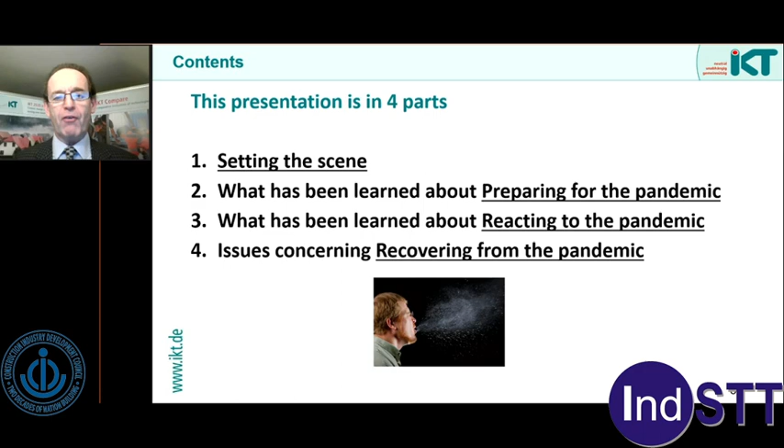They focused on 3 things then: How was the disease and the virus transmitted? What role did water and sanitation play? And what do they need to worry about concerning occupational health and safety?

From that first meeting, they agreed 3 principles. They had to be very careful about the occupational safety for their staff, avoid unnecessary risks, but concluded on the evidence available that if they applied the usual hygiene regulations that apply to working around sewage, then that should be sufficient for the moment.

It was the last time they met together, as I said, and they then did 4 things subsequently. They regularly discussed and shared plans with each other of how they were coping with the pandemic. They made a decision to open up their discussions to other sewer network owners and also to publish information in English. So we did a series of 3 English language webinars to widen awareness.

The members started sharing their documents online, and if you search for KomNet Abwasser, you will find, it's in German, you'll find the information they shared with each other, and IKT provided a help desk for them.

Fairly typical of actions taken by associations throughout the world to help their members.

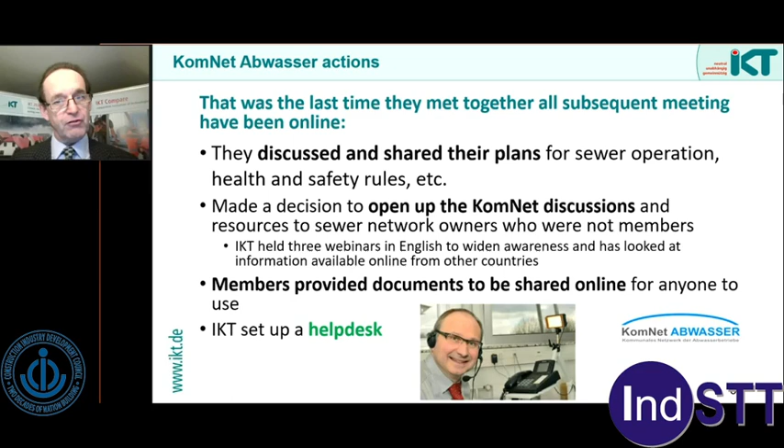Assumptions initially had to be made about the risks for water and sewage, and subsequently they proved correct. So that provides some reassurance that collectively we'll be able to respond quickly to the next pandemic when it comes along.

We looked around for guidance and advice, and actually one of the most comprehensive guides we found was a checklist that's been produced by the US Environmental Protection Agency. It's their incident checklist for pandemic incidents, and that divided up the actions into 3 stages: preparing for the pandemic, responding to a pandemic, and recovering from it.

So preparing, in a way, we're still ongoing because situations change and national regulations change, so those had to be thought through. But mostly what is happening at the moment is responding to the pandemic. We're not in a recovery phase yet.

When I say we're not in the recovery phase yet, we still really don't know how this is going to pan out. So we're in stage 2. We don't have vaccines commonly available yet. There is no cure, and further waves of infection are expected.

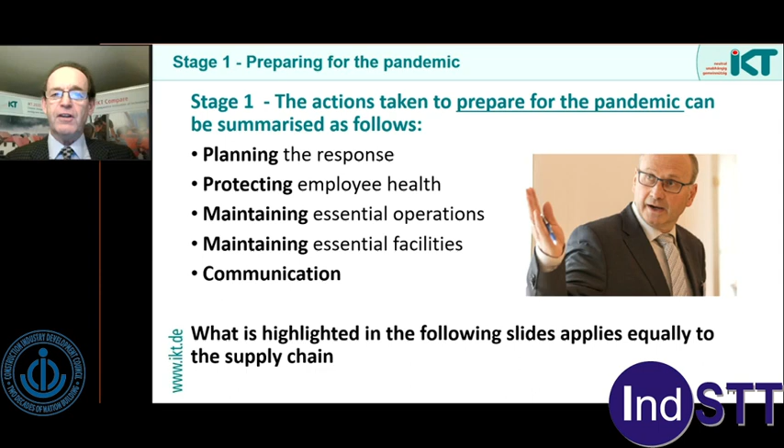The typical planning actions: creating a team to lead the response, updating the response plans. Really, nobody's existing response plans anticipated exactly what was going to happen in terms of lockdowns, shutting down of business, disruptions to the supply chain, and for many businesses, losing all of their income overnight. Reviews of information technology, the hardware, the software, how we're going to communicate, and ensuring how staff are going to be able to continue to work under national regulations, for example what counted as being essential services.

When it came to protecting employee health, you need to review your existing rules, ensure personal hygiene, ensure the supply of protective equipment, but particularly check all the way through that employees understood what they had to do. For those who didn't have to be out in public contact or working in the field, arranging home working and other social distancing measures became important.

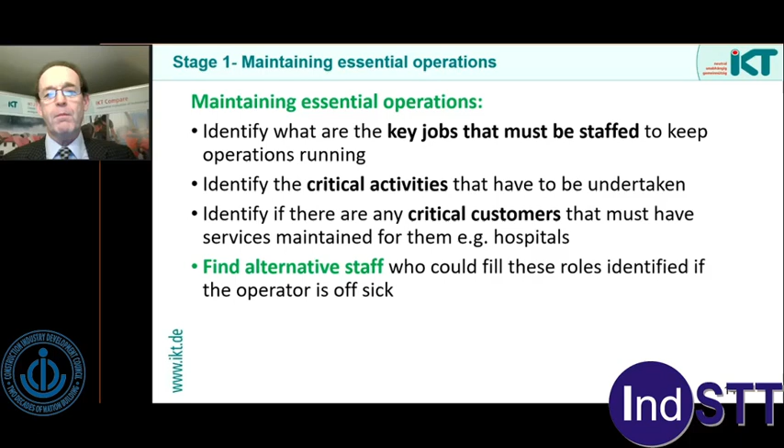For us, managing essential operations was a case of identifying what jobs needed to be staffed in order to keep operations running. What were the critical activities that had to be undertaken? Also, who were the critical customers - the hospitals and other facilities that absolutely had to be kept online for supply of water and wastewater. And then finally, supporting all of that was finding alternative staff, trawling through staff in water companies and others who perhaps had past experience of running pumping systems or a treatment works or a distribution network, who are perhaps now doing desk jobs but might be available to be pulled back if needed.

When it came to the facilities, clearly there's pumps, tankers, valves etc. which need to be maintained, but also what equipment was needed to maintain them, what supplies were needed. So there's a lot of activity around working with suppliers, developing the systems, and finding alternative sources and creating stockpiles if necessary.

Continuing with the theme of stage 1, the final element was communication - what needs to be communicated to customers and others, and how to set those up. Particularly, I think one of the main lessons that came out of this was a realization that perhaps traditional ways of raising or collecting revenue from customers would have to change, and that online payment was perhaps going to have to be created as the new norm.

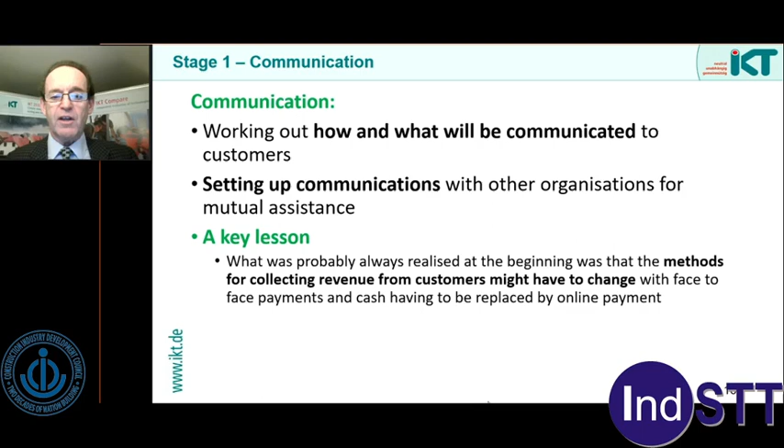When we look at how there was a response to the pandemic, we've covered several of those items as well, so the plans are in place. Now it's all about protecting employees' health, maintaining operations and facilities, doing the communication. But there was also an important one - actually recording what went on, particularly for those water companies in a heavy regulatory regime in terms of finance, environmental protection, or performance in terms of customer complaints. They needed to really understand what happened so that they could subsequently argue the case with regulators if there were likely to be penalties for what had taken place.

So this is the sort of stage where most of the sewer network operators are currently at. And when we look at...

A key issue that actually cropped up for many organizations was actually getting their staff recognized as being essential workers. This wasn't recognized everywhere, so you have guys out trying to maintain water and sewer supplies getting stopped by the police. You get angry reactions from the public, seeing people working in the road saying, you're going to give us this disease, what are you doing here, and having to explain to them that it was essential that their water and sewerage was maintained. In many cases it was also necessary to be an essential worker in order for staff to be able to work, if there was childcare, free movement, or even testing services available for essential workers only.

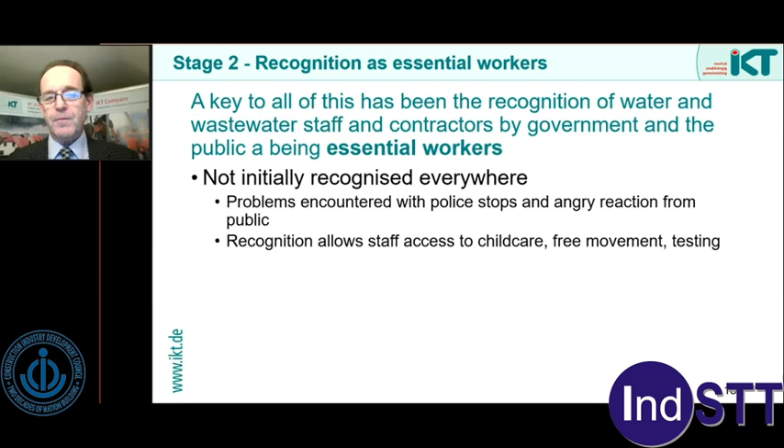When it came to protecting the health of staff, these were the sorts of measures taken: outdoor team meetings for field and office staff, one man per vehicle or two men per vehicle but keeping teams separated, so if one team went down with the disease, others wouldn't, and maintaining social distancing rules when working.

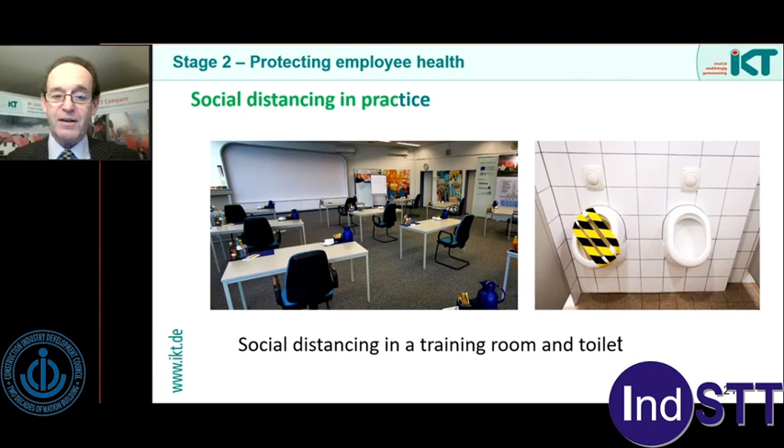Keeping staff informed about the risks cropped up. Partway through the year, it was announced in the press that it would be possible to test for coronavirus in sewage because it had been found there. This caused consternation, and right across Europe, trade associations and others had to deal with concerned staff and their families asking what this meant. Unfortunately, the initial press releases hadn't explained that it was just genetic material found, not the live virus, and that caused quite a lot of trouble.

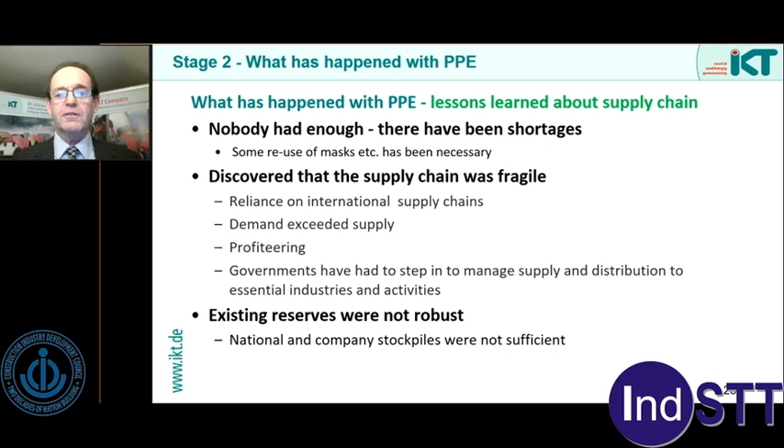I touched upon what happened with PPE. Nobody had enough, there were shortages, and it was discovered that the supply chain was fragile and existing reserves were not robust. So there were a lot of lessons learned there for future pandemics.

A really interesting development was home working. There were issues to start with, such as what hardware and software to use, and whether there were any human resource or health and safety issues. But actually a lot of staff discovered they liked working from home and were able to continue doing their roles, with fewer interruptions. There are a number of studies showing that productivity and innovation can actually improve with people working from home.

There's a reduction in office costs, though some equipment costs for equipping people to work from home.

The really big thing that came out of it, I think, is the surge in use of online communication. The water sector is pretty conservative, and over the years many people had been trying to say let's communicate online rather than having endless meetings and traveling halfway across the country for sales and project meetings. But most water companies have now discovered that it works well. Communications are faster, and there's also a pleasing reduction in costs for conducting meetings, travel, and training.

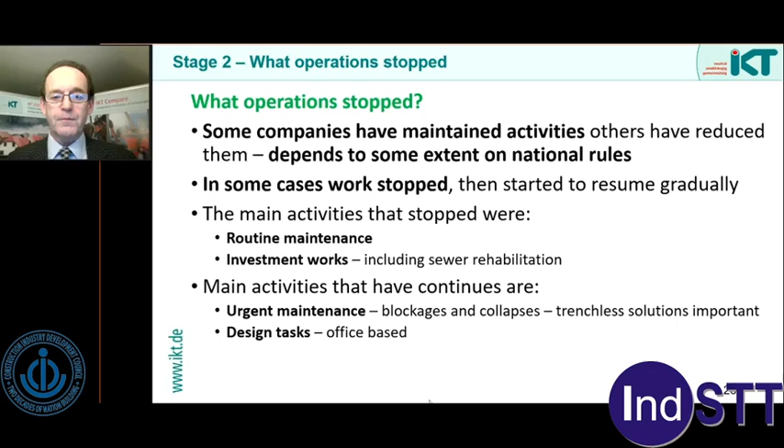Looking at contractors, in some cases they haven't been able to work or had to reduce their active staff. There's been a knock-on impact felt in terms of contractual arrangements, with more flexibility on both sides, contractors and clients: better ways of dealing with deadlines, not applying financial penalties for delays, extensions to delivery times, other consequences of delays, and more interruptions allowed or suspension of work. There has also been some postponement of tenders or offers during the period.

Critical for the water and sewage companies themselves, though, is what's happened with their funding.

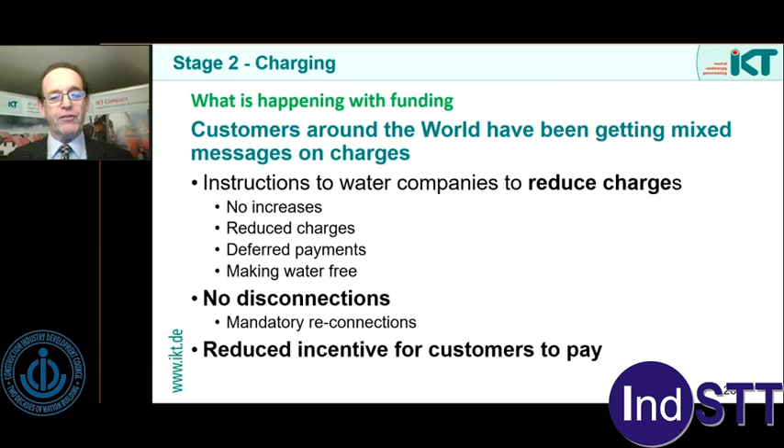Around the world, customers got mixed messages. Water companies have been instructed variously by governments not to increase charges or to reduce charges, to defer payments, or even make water free, no disconnections and mandatory reconnections. So there's been a reduced incentive for customers to pay.

And then there have been changes to revenue. Commercial and industrial revenue dropped during closures, domestic revenue went up. If you are a water company in a city, no commuters, no tourists. In rural areas, more domestic use from people staying home, but fewer tourists. So different impacts felt in different places.

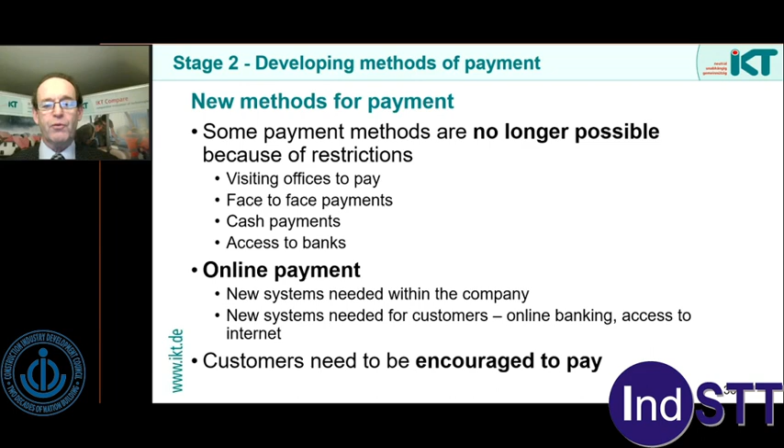There's been a need for new methods of payment. You can't have people visiting offices making face-to-face payments. Cash payment became difficult, access to banks has been difficult. So new systems are needed with online systems. Online banking has seen a surprising increase throughout the world. But of course, customers do need to be encouraged to pay.

The impact has been interesting. The World Bank recently reported a 10 to 40% reduction in revenues, and as high as 70 to 80% in the case of some of the water companies they were dealing with. So they've created spreadsheet tools.

The Latin American Bank has had a similar experience. And in Europe, Aqua Publica Europea, a trade association dealing with publicly funded water and sewage companies, said their members reported a 10 to 15% reduction in income, and as a consequence, having to stop part or all of investment.

As a result, in many countries trade associations representing the sector have been raising issues of financial support on behalf of their members. Public finances are going to be under strain for years to come, so it's apparent that water and sewage companies will have to find smarter ways of delivering their services for less money. Trenchless technology has some advantages here.

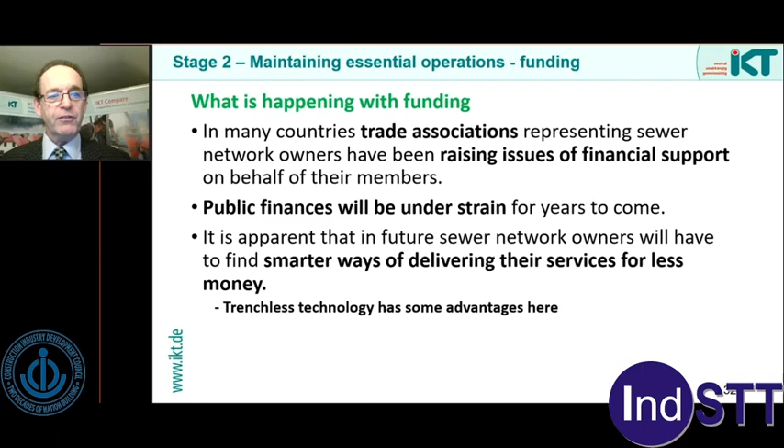I've mentioned communication with regulators and keeping records - that's been a key lesson learned, particularly if you've had activities that had to be stopped, you had to keep regulators informed and aware of issues. That's another place where trade associations have been important, working on behalf of their members to raise such issues and deal with authorities collectively.

On this theme of associations, the current situation has really highlighted that associations have a role to play if there's a change in advice relating to transmission. They've got a job to play for members in signposting changes in national regulation, lobbying government and regulators on behalf of members about public health, financial support, environmental regulation, and providing access to experts who can give needed advice.

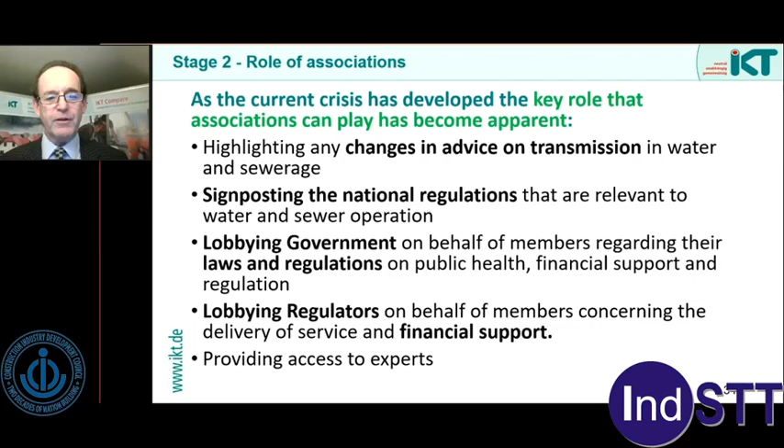What's been fundamental to that? Embracing online communication, such as we're doing today. You can't hold face-to-face meetings, so online is likely to become the new normal. Working from home is now acceptable, and you can now undertake meetings daily, weekly, or monthly. In Germany, the KomNet Abwasser now meets every Friday. In the UK, the Sewer Rehab Contact Group, which met 3 times a year, now meets every month online.

But the converse side is that conference organisers are experiencing problems with events. Major events like the German IFAT exhibition should have taken place this year - it's now not going to take place until 2 years later than otherwise expected. And in the UK, STT's annual No-Dig event was put back from September to next March, and now that's being put back from March to June.

A major outcome, I think, is going to be more automation and remote working on sewer networks. This is where all companies have the opportunity to learn from each other nationally and internationally. There's going to be a lot of innovation and development, and water and sewage companies are going to be more receptive to new ideas.

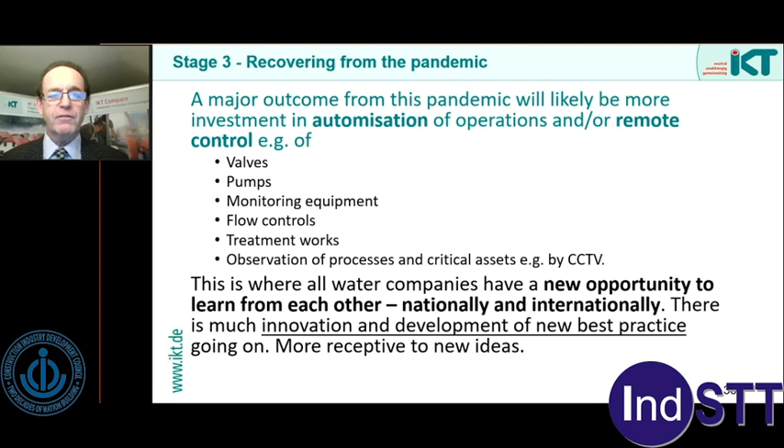What next? This is the final slide. The situation's still evolving, the disruption is going to be long term, and there's a lot more information and data that's going to emerge. Keeping an eye on what's going on internationally and nationally is going to be important. Creating or joining networks of organizations which can answer questions of mutual interest is probably the best way forward - that's really emerged from the lessons learned from this pandemic so far, and different countries are at different stages, so there's a lot to learn from each other.

So we talk of a new normal when this is over, after the pandemic - the new normal is already here. It's coping with the pandemic whilst having to make tough decisions about water industry investment and operations. Essentially, going forward, most water and sewerage companies are going to have to find new ways to continue delivering their essential services for less money, and quite clearly there is a role that trenchless technology can help with.

We are an engineering research institute that undertakes work primarily for sewer network owners to evaluate issues that they have and identify solutions. So the talk I'm giving now is divided into 5 parts. I'm going to explain what we expect from flowable backfill material, explain the background to the evaluation that we undertook, how that was undertaken, what the results were, and what conclusions did we come to at the end, particularly with regard to quality assurance.

So what is flowable backfill? Well, it is backfill that can be poured into a trench, will spread out, in theory self-level, surround pipes or other structures, and does not require compacting like normal backfill. But it is a mixture of materials. Natural soils or sands and gravels are brought in, or recycled materials can be used. You have binders, you have various add-ons like stabilizers, and its consistency is usually controlled by the amount of water that it contains.

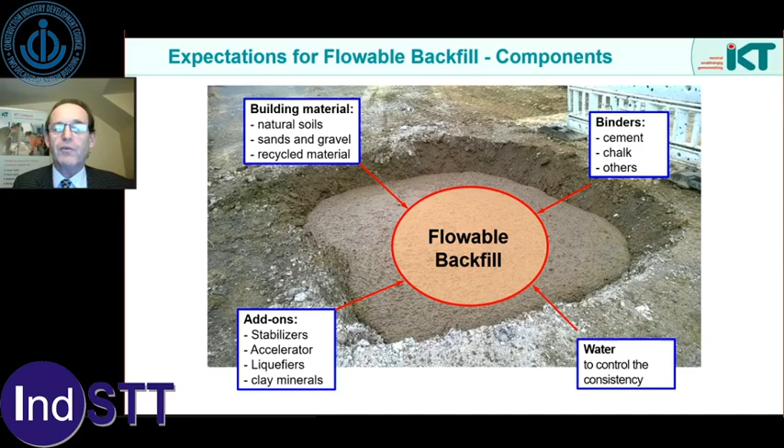But what are its advantages? Well, it can be used in these hard-to-reach areas. So perhaps areas where it's difficult to get other normal compacting equipment into, because we're always interested in being able to properly support pipe work and underground utilities. It's particularly useful in sewer or pipeline construction as a consequence.

Because it's flowable, the expectation is that it will self-compact and it will fill the available space without creating any cavities, without the need for mechanical compaction to ensure that. And in theory, it should be homogeneous, constant throughout in terms of its volume and stability. But particularly, what you want from a flowable backfill, which makes it different from flowable cements, foaming concretes, that type of thing, is that you can re-excavate it when you want to, and you should be able to re-excavate it easily, so you can get back down onto those utilities.

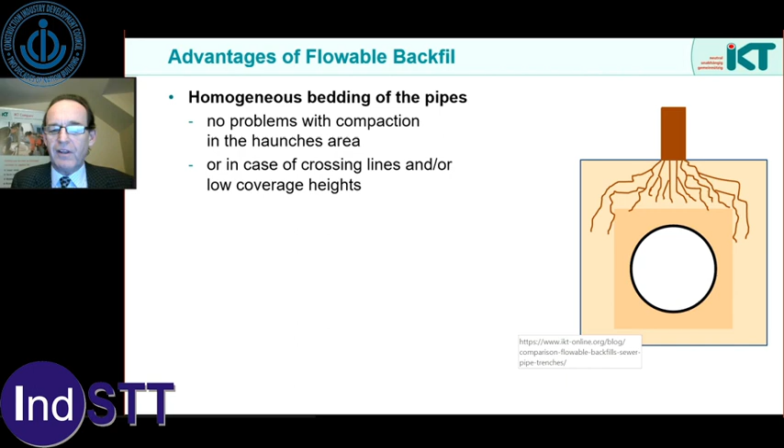We mentioned the homogeneous bedding of pipe. Now, one issue with conventional backfill is that it's difficult to get into the haunch areas underneath the pipe in order to properly support it. So with a flowable backfill, this should sort that issue out for itself. And it can be useful if you've got low coverage above, or if you've got other intricate arrangements that you get underground. It can flow in and around all of the structures that are there.

We mentioned the no compaction device being required, so in theory you can have smaller working spaces, narrower trenches. As a consequence of no compaction, less vibration, reduced emissions, perhaps lower excavation costs with the narrower trenches. And it's adjustable. You can adjust the composition depending upon what you want in terms of how quickly you can walk on it, what sort of final strength you require, and the requirement for re-excavation. Because it sort of flows around with very little space or pores in between, it can provide protection against root intrusion and also against infiltration or exfiltration of water into or out of a pipe. And it can have properties in terms of being non-permeable to gas.

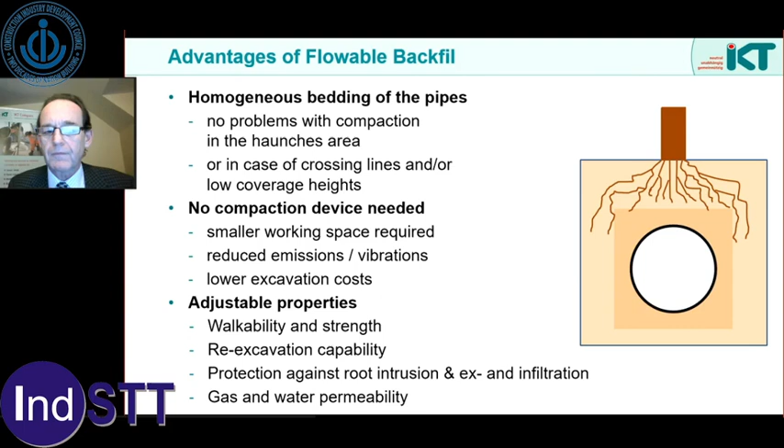However, it's a liquid. And so one of the things you have to be aware of is that if your pipes are empty, you may get buoyancy issues. So you have to use some form of buoyancy control. You need to consider the static calculations, because you're introducing this liquid into the trench, the interaction between it and the surrounding soil. And you may require lining of the narrow trench, and you need to be considering the fact that it's flowable, so it could leak into other spaces. So you have to be sure that there's nothing else it's going to go into where it shouldn't.

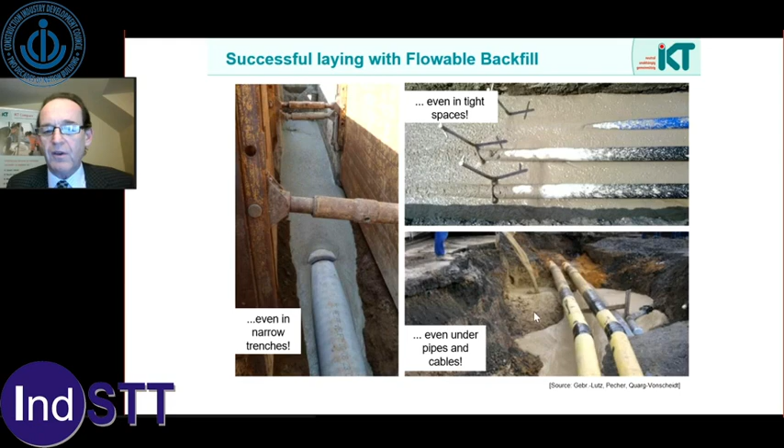So what it might look like at the end of the day: poured into a narrow trench, filling around the pipe, getting into small tight spaces between different utilities, and working quite well in odd shapes where it might be otherwise very difficult to get in and do your normal compaction.

So what did we do with our evaluation? Its objectives, and the objectives of all of these evaluations we do, are to create market transparency, to reduce the investment risk for the sewer pipe owner who is wanting to commission the pipe and use this material.

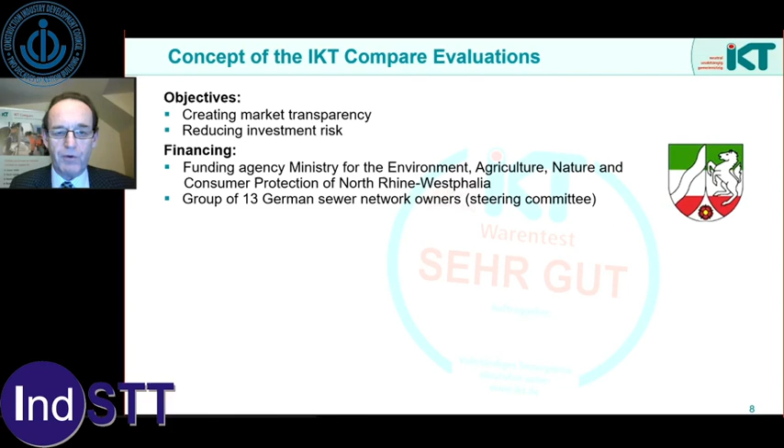The project we undertook was funded by the Ministry for Environment in North Rhine-Westphalia, Germany's largest state, and also by a group of 13 German sewer network owners who formed the steering group for the project. The steering group made all the decisions, advised by IKT, but they selected the products to be evaluated, the manufacturers to use, the suppliers, development of the test concept, and what kind of evaluation scheme was used.

The outputs from this are 2 reports. First, a report on this comparative exercise we undertook, which is already published and in the public domain. Then there is going to be a wider project report which will be published looking at the wider issues surrounding this and the QA lessons that were drawn out from it.

And what does it mean for the market? The consequence of this exercise is that the sewer network owners understand quality assurance issues. They can call for improvements on products, or look for improvement in products, and they become informed customers or informed clients who know what to ask for.

So how do we go about this evaluation? We created, in a large test pit that we have at IKT, 5 identical pipe trenches. These were 3 meters wide, 3.5 meters deep, and 6 meters long. In them we placed 2 manholes, a concrete and a plastic manhole. We had a sewer pipe running between them and various other pipes.

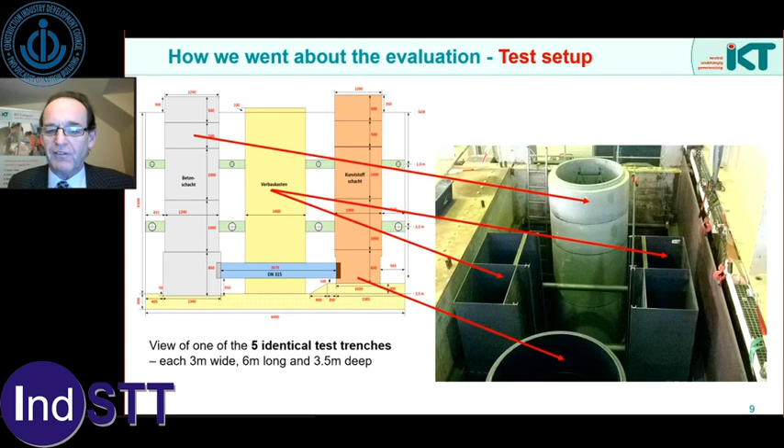Also, we were interested in shoring. The next slide explains how this worked, because we wanted to know what happened when we ripped the shoring out of the sides of the simulated trench, and to see what happened to the flowable backfill. So what we created was these boxes either side, simulating a narrow trench with shoring that could be removed. We filled them with sand right up to behind the shoring in 2 cases, but we left a void in the others, as you might find in an uneven trench. We wanted to see what would happen when the flowable backfill moved into those voids when we removed them.

Another view of the layout from above, just showing the pipe arrangements. We were interested in how it would flow around small arrangements of pipes, so we created a little box of pipes here. We had the main pipe at the bottom, and then 2 more sewer pipes higher up. Also, there were some cross members supporting and taking the weight between the 5 cells. There were 5 identical cells like this.

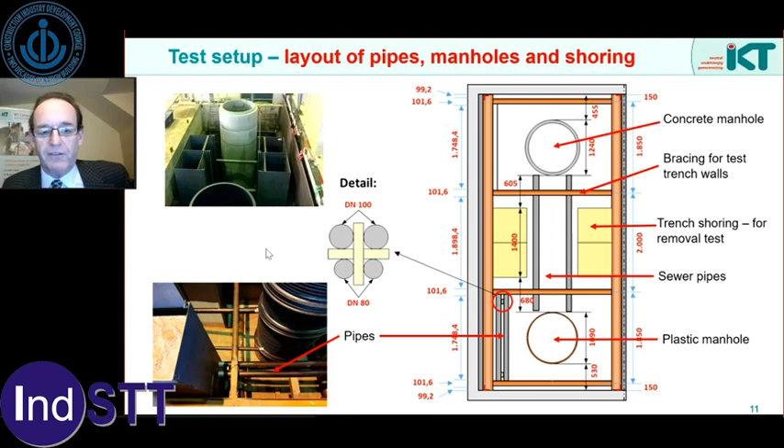So we dug it up to see what would happen and looked at the material. On the quality assurance side, we looked at various aspects to do with the delivery notes, what monitoring was in place by the installers, what quality issues and quality marks they had, training, and we also looked for anything notable which occurred during the project that we weren't expecting.

Now, we had a couple of knockout criteria, or KO, as opposed to OK, the KO criterion. So if it didn't flow properly, that would be a failure outright in the installation phase. If it doesn't become strong enough to be able to build over, i.e. put a road back on it, that would knock it out in the use phase. And we also needed to know whether it could be re-excavated easily and recycled. So that was how the overall scoring system operated.

We selected products. There were 16 relevant products available on the German market that were discovered, this is in the last couple of years. The project finished this year. We looked at what we wanted in terms of the composition of the material, the requirements set out by the steering group.

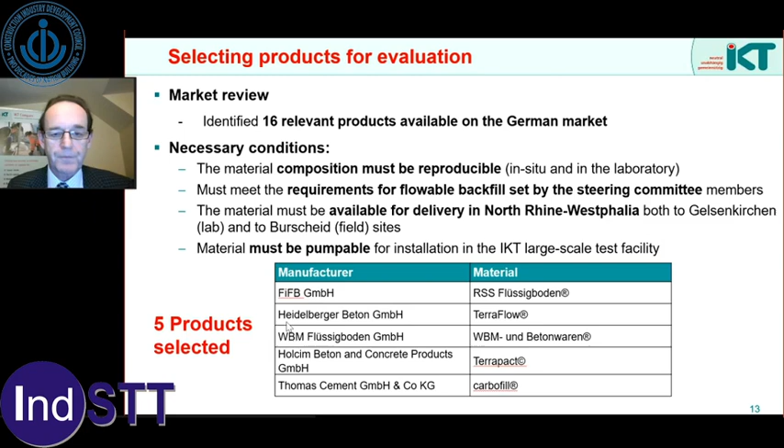So first of all, we did the installation phase. We're looking here at flowability, how it could support pipes, what happened when we ripped that shoring out, how stable was it volume-wise, and the accessibility was how soon could you walk over it. That scored variously, contributing 40% to the overall 85% for the performance checks.

So with the flowability, the most basic test is done, as you might do with other types of flowable concretes, etc. It's spreadability - how wide does it spread when a certain amount is poured from a particular height? We looked to see how that would function.

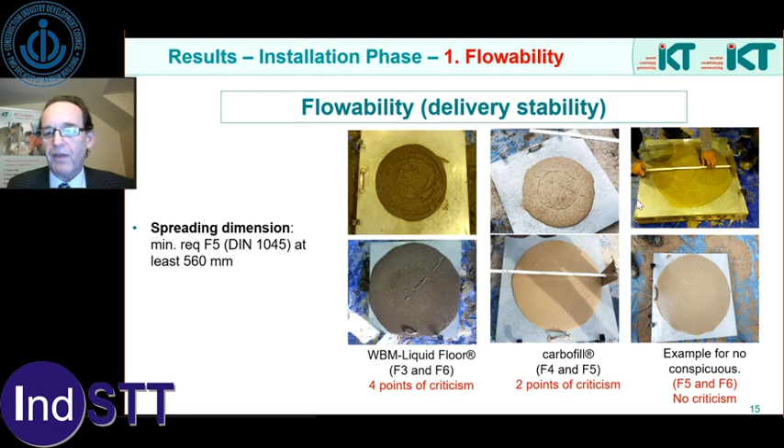There were a range of issues as well to do with it - the consistency of the material, its stability. Self-leveling was interesting. We only poured the product in at one corner of the trench, and when it was finished we looked to see did it actually level across the whole trench, or was it higher at one side and lower at the other?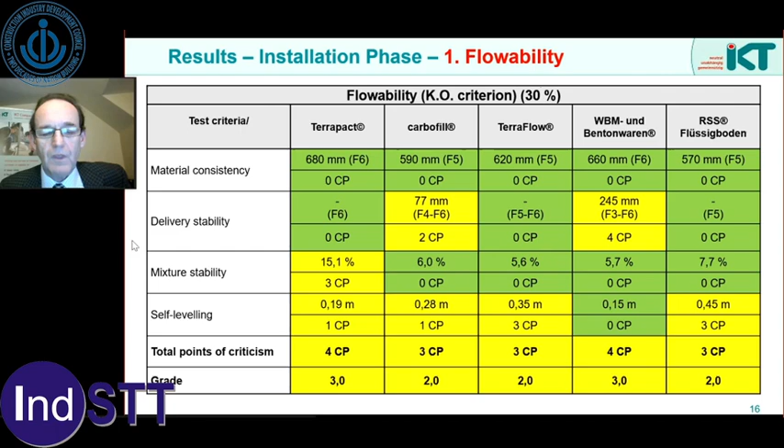We looked at the pipe support. So when we came to the excavation, we excavated down very carefully and we lifted out things like the shoring between, or the bracing. We lifted out the longitudinal pipes and we also lifted out the main sewer pipe to see what it would look like underneath.

And these are the sorts of things we found. These are fine. We did find in some cases that there were small voids, but overall those were statically irrelevant. When we did the static calculations, they were not going to severely impact the support to the pipe.

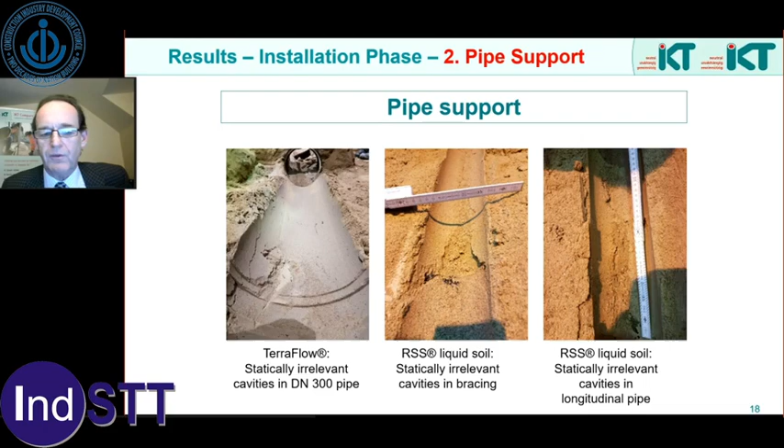We got a range of results again, but one product we actually found we couldn't excavate. It had set so hard we had to use mechanical equipment to break it up. So we were not able to tell how well that had actually performed as we were breaking it out of the ground. But with the others, we had 2 which had absolutely no issues. We had a few small cavities and 1 or 2 others. So we've got scores between 1 and 2 for the other 4 products.

When we pulled the shoring out, that was interesting. Now, we don't know when to pull it, so we asked the advice of the suppliers. How long do we leave it before we pull the shoring out? So it was more their decision, and we discovered we've got a range.

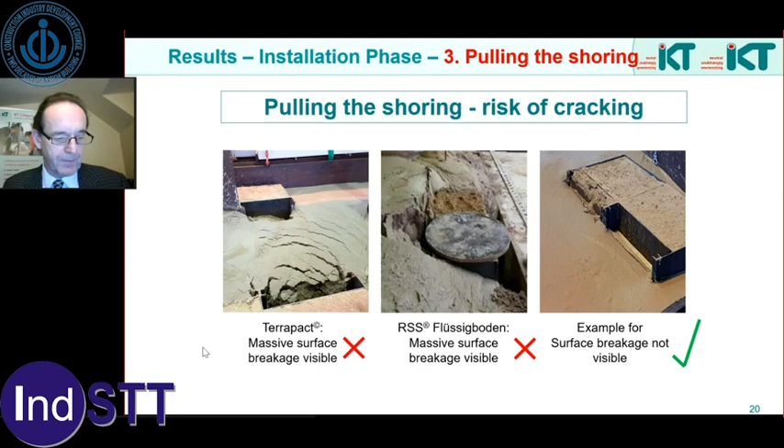The result from pulling the shoring, again, fairly mixed results. 3 of them were very good. A couple of them had issues where, as I showed you there, we had the breaking up of the surface. It could have been that we were advised to pull the shoring too late. So that is something that has to be considered with this type of product.

We looked at volume stability. So this is a product containing water. In these tubes, we looked to see what happened in terms of settlement and also the settling out of the water above. And we scored them again, and we've got a range of scores from 1 to 2 here.

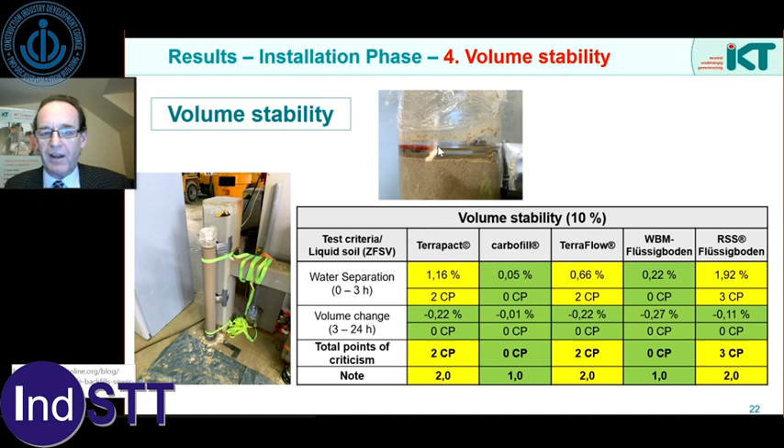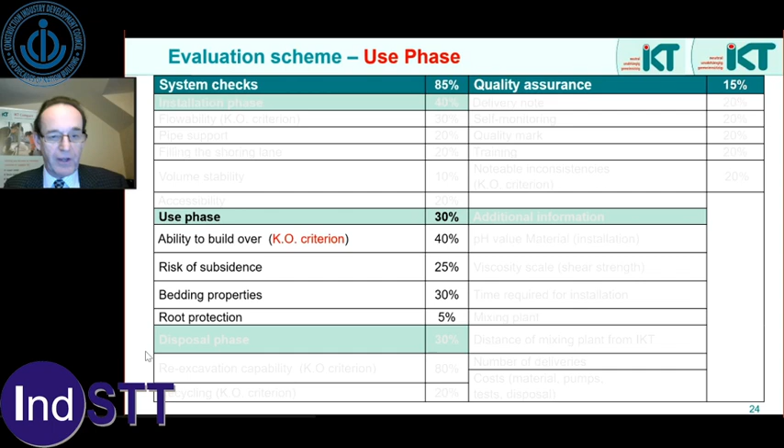So going to the use phase, we looked at the ability to build over. That was one of the failure criteria. We used a static load plate to look at what level of support it was able to produce after 28 days. This is a fixed time, but obviously in many cases it would have been possible to build over earlier. We had one product that took 56 days and still wasn't properly supporting, while others had a 7-day value here.

And we also looked at risk of subsidence — where it shrinks over time. We did initial volume stability tests, but also longer term exercises in pots where we looked to see how it shrunk and whether there was subsidence risk. But that was not an issue in most cases.

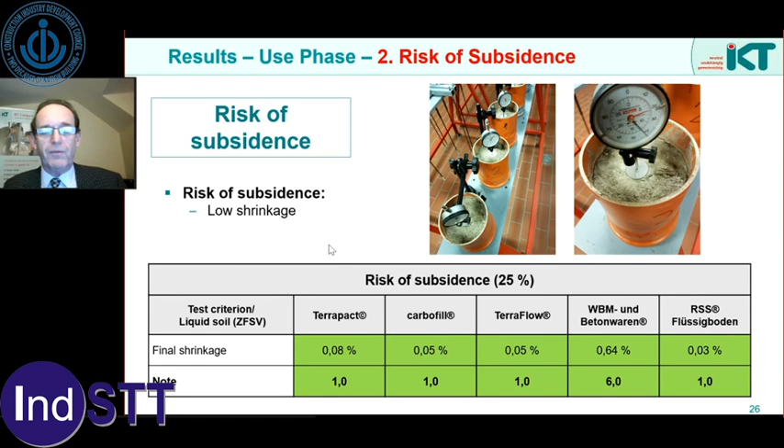Looking at tree roots, when roots grow in or near a pipe, it's usually because they're following the path of least resistance. A series of cracks on the surface here would allow tree roots into this structure, but as we discovered, it didn't go all the way through to the bottom. Also around a couple of sides of the manholes we're seeing a bit of shrinkage, and we got odd little bits of shrinkage or cracks around the edge of shoring, which would give roots a way through.

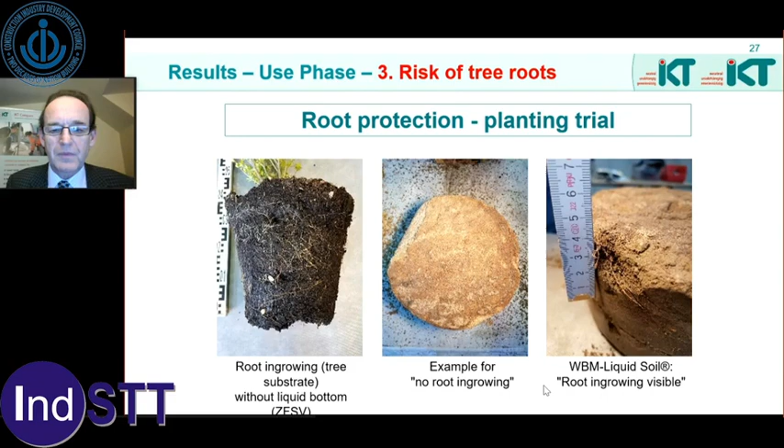We did some experiments in pots with ordinary soil and pots containing the liquid fill, and in one case had some evidence of roots managing to get through the liquid soil, but in most cases they couldn't. So again, a range of scores were achieved from the different planting trials.

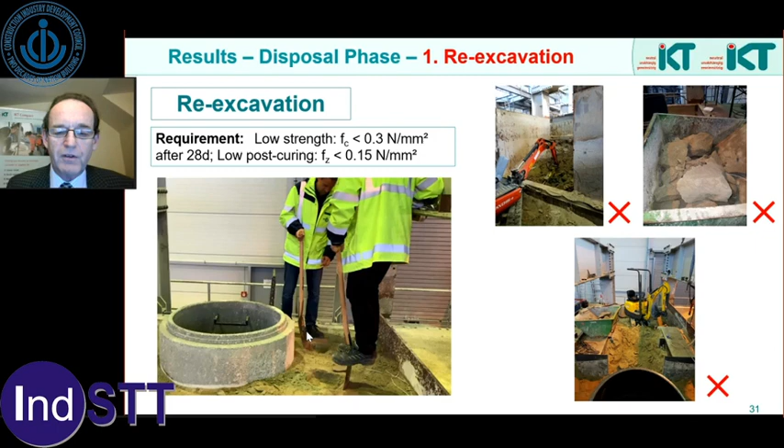When it came to disposal, we did have some issues. The steering group members went in with spades, trying to dig into the surface of one of the soils, which they couldn't do. We ended up having to get the contractor in with digging gear to cut it out, and it was not successful as a consequence. So with re-excavatability, we actually had 2 products which proved very difficult to excavate, and of the other 3, only one was really excavatable, but the other 2 weren't too bad.

With recycling, that again was interesting. We had to look at recyclability using a scoring system in Germany, which is based upon acceptance in landfill sites. We did have one product which would not have been acceptable in a landfill because of its chemical composition.

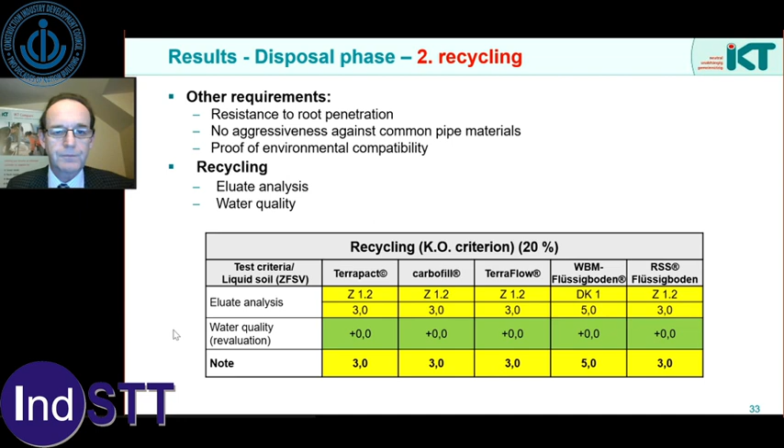And then when we moved on to look at quality assurance, we found a range of results, from no issues, shown in green here, to some minor issues to do with training, etc. But under conspicuous features, one product — they didn't deliver enough material, had to go back and get more, so we didn't get what we originally asked for. There was also some issue with the calculation of how much material was delivered to site.

One product, they ended up adding some water when they got on site in order to make it flow better, and then we discovered that the warranty was invalidated because water had been added on site. And one product, we had an issue when excavating it of the smell of ammonia, which exceeded the acceptable limits, and we ended up having to use gas masks for the staff when they were excavating.

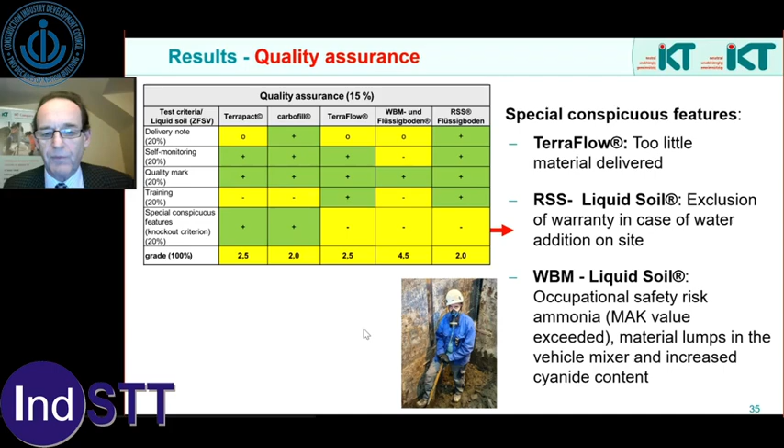So the overall scores we got from these products — bearing in mind this is rated upon 85% for performance and 15% for quality assurance — we had a couple of goods, one unsatisfactory, which was marked down because it was difficult to re-excavate, and 2 that turned out to be inadequate. One because it was more or less solid when we tried to re-excavate it, and one which had a number of issues, particularly around recycling and disposal.

So if you remember, we had these knockout criteria — if you failed them, that meant it wasn't acceptable in that formulation. So what were our conclusions? We found large differences in quality, as you can see. But we did discover that the various advantages of flowable backfill could be achieved in terms of pipe support, flowability, and re-excavatability.

Generally, it was calculated they could be built over after 7 days, and it may obviously be less. You could do more calculations if possible.

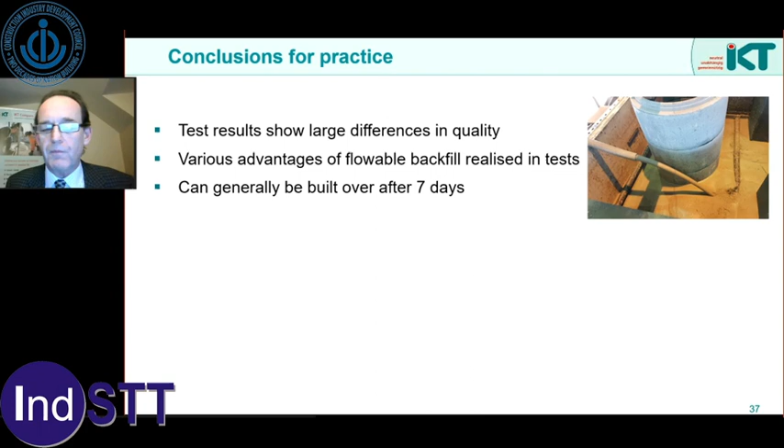We realized that the knockout criteria identified by our steering group were the ones people should be looking out for.

It was realized that a lot of the issues discovered, like material that wouldn't excavate and material with recyclability issues, were down to the management or quality assurance of the mixing plant and the materials used. So that is normally out of your control, and you've got to rely on good QA by the supplier. There is a real conflict between re-excavatability and being able to walk or build over quickly. That comes down to the formulation and the mixing, and needs to be carefully taken into account.

We discovered that when you pull the shoring out, you can get disturbance, and that is a bit of an art, knowing when to remove the shoring. That's based on experience. And quite clearly, there is a requirement for quality assurance and supervision on the construction site.

We realized that in Germany there were very few suppliers that could supply across the whole country, so it tends to be more of a local supply market.

To finish, there is a report publicly available on the website, which you can find through our IKT website or using this link. There will be a full report out in due course, and there are contact details at the bottom here for emails from myself and Dr. Mark Klamath, who was the project manager for this. Thank you very much for this opportunity to present, and we now go into questions.

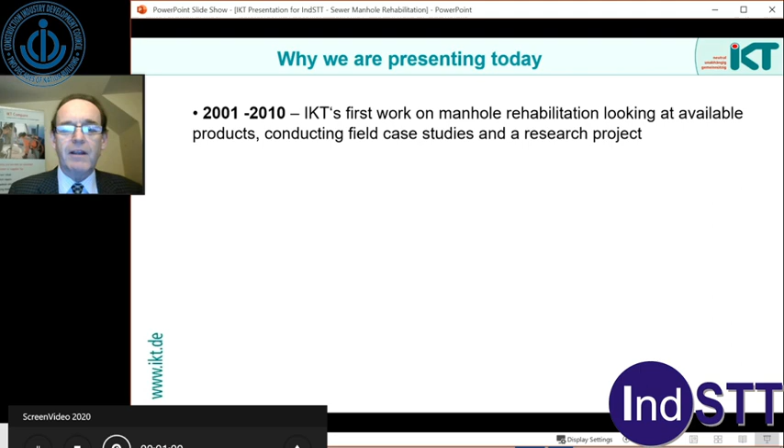So why are we presenting today on manhole rehab? It started two decades ago when German sewer network owners first became aware of products available to help rehab sewers, particularly concerning preventing infiltration. We did more work on something else of interest to them, odor control products placed beneath manhole lids to stop smells getting out.

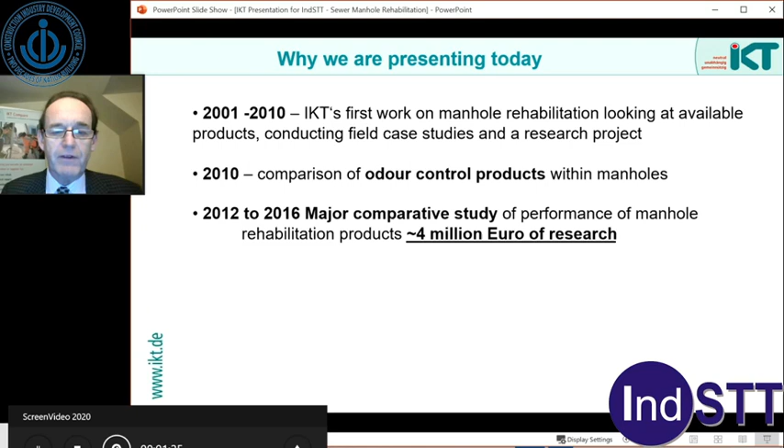Our main research was undertaken from 2012 to 2016, culminating in a major study comparing the performance of different available technologies. Since then, we've been doing quality assurance field studies involving hundreds of manholes in the Netherlands and Germany, and running 2 to 5 day training courses.

So what I'm going to talk about are three things: setting the scene of what happens with sewer manholes in terms of their primary and secondary functions, how we went about comparing the performance of rehab techniques, and finishing with some of the lessons we learned.

Well, what about sewer manholes? They are more than just a manhole cover, which is what most people see. Down the shaft, they're actually possibly the poor relation of the sewers themselves. A lot of effort goes into keeping the sewers flowing, but not so much into managing the condition of the manholes, although an obvious issue is often failure of the rungs that allow access, and in this case they've been removed.

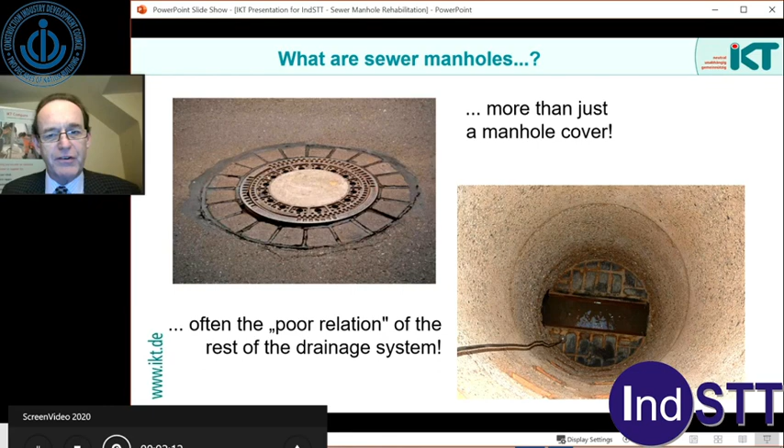The primary function is the relief of internal pressure, and when this happens it can cause damage to the interior of a manhole shaft. Another primary function is accessibility for people and equipment to get in. So climbing technologies and equipment to stop falls and encourage occupational safety are important, as is concern for atmospheric measures relating to dangerous gases.

And another third of the primary functions is ventilation, allowing oxygen to get in, and unfortunately, that does result in odor nuisance.

There are a number of secondary functions. As part of the sewer network, a manhole should not allow infiltration. Uncontrolled water ingress can result in overloading of sewage treatment works, where too much volume of water is received during periods when the groundwater table is high. Conversely, you can get exfiltration of sewage into aquifers as a result of damage to sewers. You've got to remember that apart from the chamber, you've got the seals which connect to the pipes going in and out of the manhole.

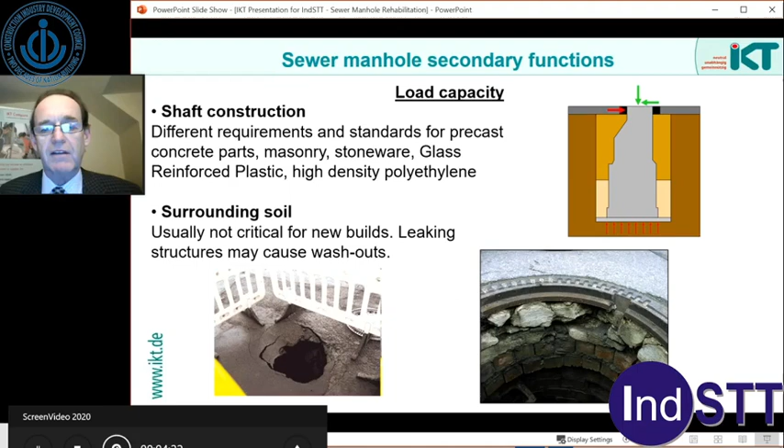Another secondary function is that it has to resist loads from above, from below, and from the sides, from the surrounding soil, in order to correctly function. So any rehab needs to take that into consideration. And a final secondary function is there is a road safety issue with the manholes on top.

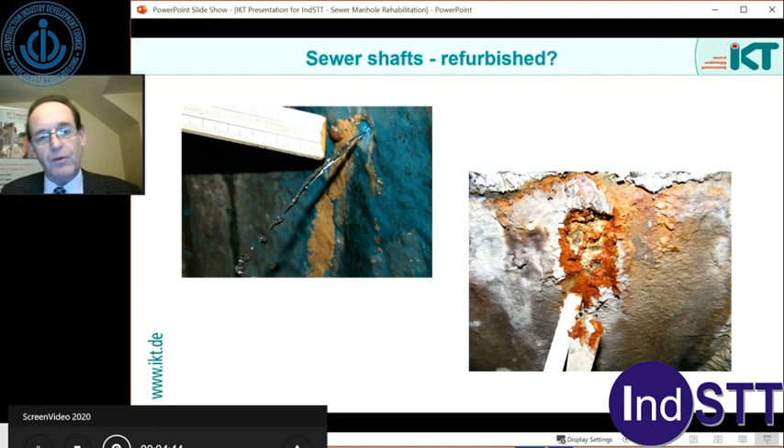So what did we do about comparing the performance of rehab techniques? The sewer network owners had started to realize that although they had these techniques available, various linings, they weren't always functioning properly. So they wanted to know which ones are suitable, what have they got to look for. The exercise we undertook, an IKT comparative project, was to look at whether you can permanently make a manhole watertight using a rehab technique. They wanted to know the strengths and weaknesses of the available technologies, what quality to expect, what issues to look for.

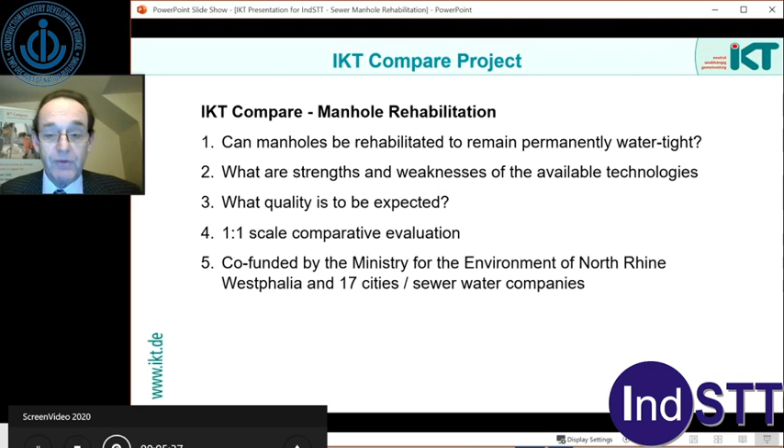We were required to undertake a one-to-one scale evaluation. The whole project was funded by the Ministry of the Environment for North Rhine-Westphalia, the largest of the German landers, and a group of 17 cities which own the sewer networks, who formed the project steering group.

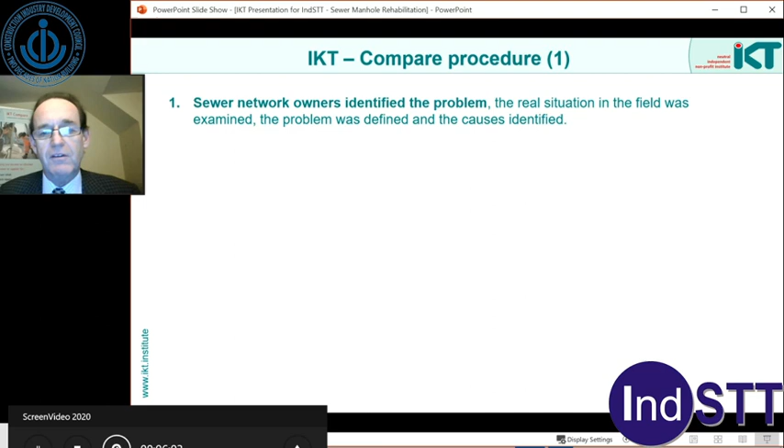Now we have a procedure that we follow with these comparative projects. We've done them for sewers, lateral connections, lateral sewers, manholes, flowable backfill, a whole range of products. We always start by working with the sewer network owners to understand exactly what the problem is that needs to be resolved. So we looked at the real situation in the field, going out with members of the steering group and looking at their manholes, working out with them what's the actual problem they want to resolve and what are the causes.

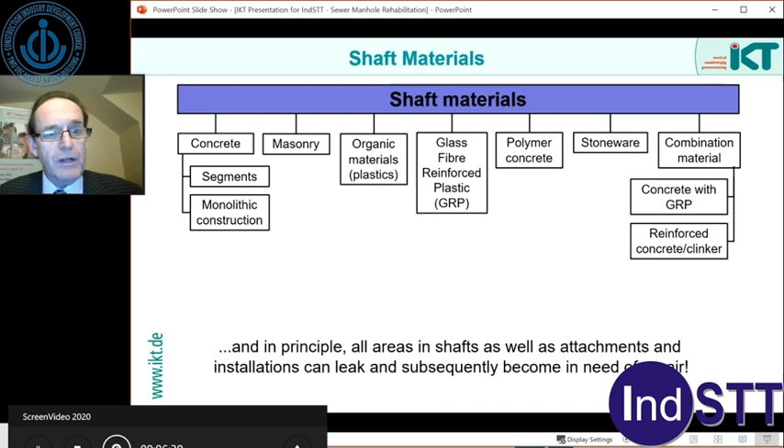Something that also became clear was that there are many different types of materials used for manhole shafts: concrete and masonry, a range of plastics, stoneware, and some combinations. It was realized that in Germany, the majority of manhole shafts are concrete, then masonry, and relatively little plastic. That's relatively new, the concept of using a plastic manhole shaft. So it was decided by the steering group the focus would be on concrete shafts.

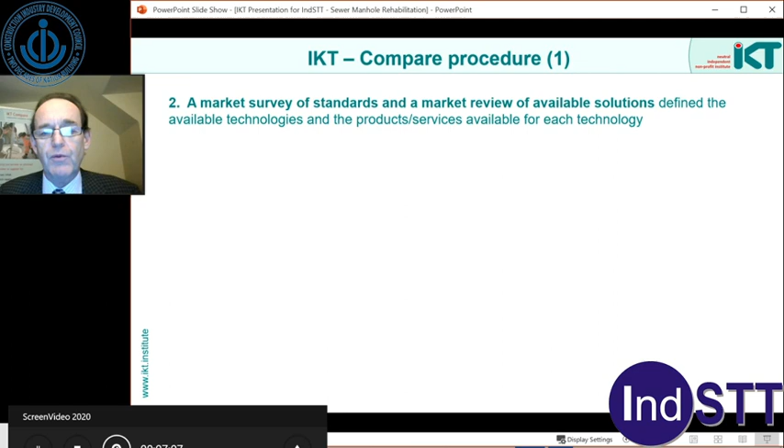We then undertook a market survey of standards, but also the available solutions and technologies - what was out there that was available to them to undertake rehab and that needed to be compared. We came up with essentially three technologies: mortar coatings applied to the inner surface of the manhole rings, plastic coatings which could be sprayed on or applied in various ways, and then linings - more physical linings where you are bolting together or inserting something which creates a new chamber within a chamber. There were a number of representative products within each of these technologies, so we were comparing technologies using a selection of representative products.

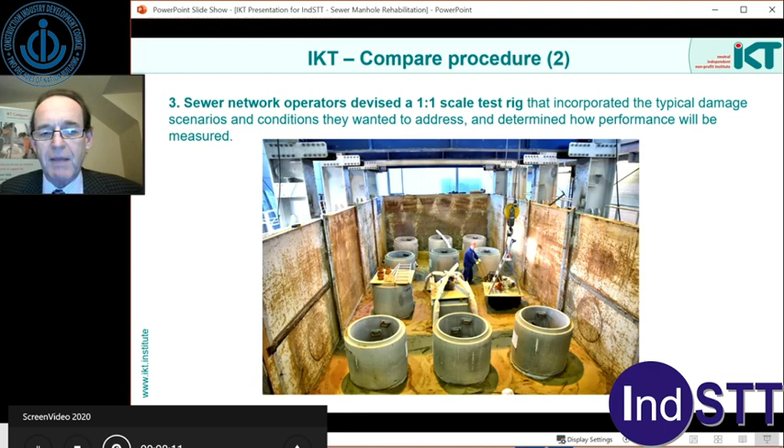For the one-to-one scale rig, we used the large test pit at IKT. This is 15 meters long, 6 meters wide, and 6 meters deep. We built a number of manhole chambers or shafts using new materials but with simulated damage patterns. Once these were built up and the whole pit was filled with sand, it looked like this. And when the suppliers of the rehab techniques came to do their rehabilitation, this is what they saw, and they had a proper manhole to work through.

A couple of extra things to point out in this photograph, which are typical of the projects we do - we do undertake a bit of research as well. There were a couple of rectangular shafts introduced at the request of a Dutch participant in the project, because they wanted to see how the spinning spray heads worked in terms of getting an even spread into a rectangular shape rather than a round manhole. Also, I mentioned plastic manholes before - there was an interest in whether these things float. If we fill this with water, since we have the ability to fill this sand-filled chamber up with water to simulate groundwater, did the plastic manhole float as a consequence?

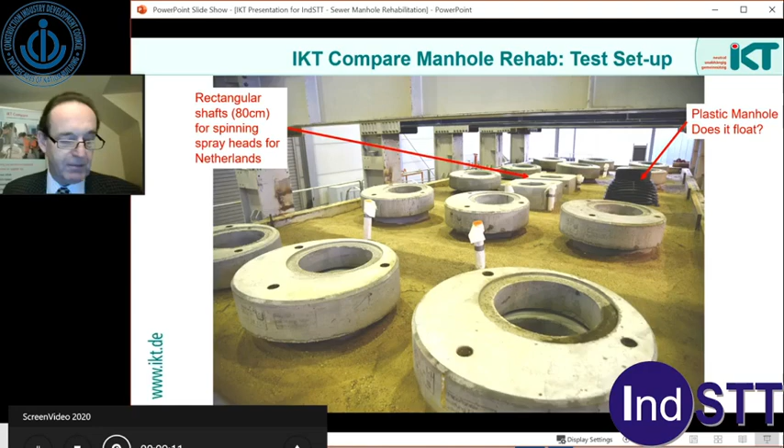Well, having decided upon what the 1-to-1 scale evaluation would be like, we had to come up with a scoring system. And what happens in most of these exercises we do, we score according to performance, but also quality assurance - what sort of QA systems were in place by these suppliers. So in this case, the performance or system tests were given a weighting of 85% and the QA 15%.

Looking down with the system tests, water tightness was considered to be the most important, so that scored 40%. The load bearing strength of the product, 20%. The robustness of the system, 20%, and acceptance. Now, this acceptance impression was actually because the steering group members had commissioned the work. They wanted to have a bit of a final say in whether they accepted what had been done. So this was based upon their impression when they saw the completed products.

On the QA side, we look at a range of things: the installation manual and procedures - if it's followed, does it mean you can do a proper installation? And the technical data sheets for the products that we've used. We want to know whether the contractor staff had been trained and what sort of training was available to people who use this equipment and materials, and whether there were test certificates available, and what sort of external monitoring program did the contractor have in place to ensure that what they installed was done correctly.

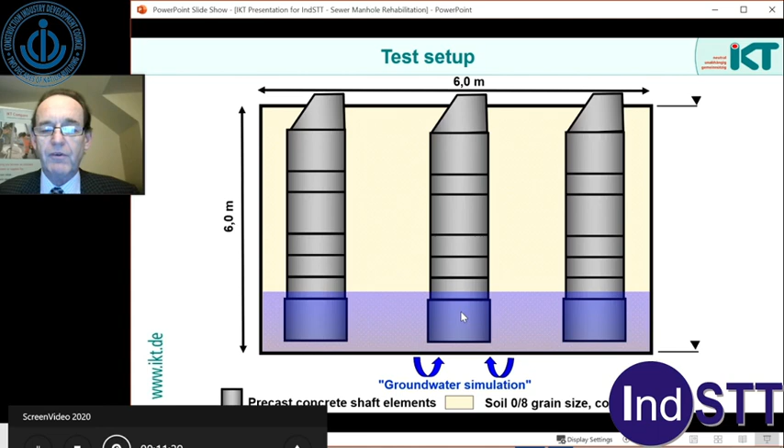So the test setup, here's looking in a sort of a cross-section through it. We have a number of chambers that were created, and we have the ability to fill the entire test pit with water, so we can bring it right up to near surface level to simulate rising and falling groundwater.

Now, I mentioned that we put in some artificial damage, and in conjunction with the sewer network owners, it was decided that there would be a series of holes. There would be a series of damaged ring joints where the rings that make up the manhole shaft were stacked upon each other, and some more extensive patches of damage with multiple holes.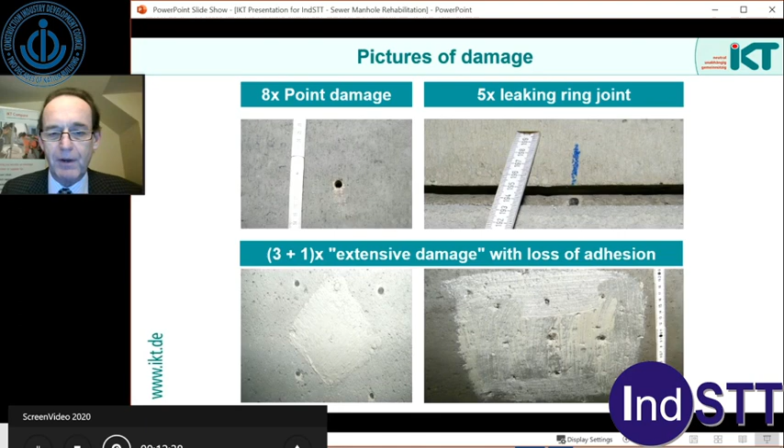And also, because there was a particular interest - how do these products perform if the substrate behind has not been properly prepared? These are particularly for the ones which rely on adhesion to the wall of the manhole. We put on a mold release agent, which would mean effectively the product wouldn't stick. These were just done deliberately to see what would happen. It's part of the experimental side of this exercise.

So we selected these products, or rather the steering group selected them. Something to bear in mind is that when we do these projects, we invite the suppliers in to see the experimental setup and comment on it. If they say, actually, what you're asking us to do is something our product cannot do, we accept that. And it may be that they decide to continue anyway, but we don't include that in the evaluation because they've declared that they can't fix that, but it may be done for experimental purposes.

So they get a chance to comment on it, and we take that into account when we are devising the final experiment. But the other thing is they're given a tender document and they are paid, just like it would be a normal installation, they are paid to come and install into the manhole chambers. And if they decline or they don't want to take part, that was also recorded and included in the project report as the reasons why they didn't want to be part of it.

So they came and did their installations, and we observed the installations, what quality control was involved, and it also gives some indication of costs, manpower, and the relative amount of time involved for using different techniques.

The evaluation, having done the installation - I mentioned we can bring the groundwater up and down - looked at the initial state, what was the product like, and how did it perform with no groundwater pressure when first installed. We then did a filling exercise in steps from 1 up to the full 5 meters, and looked at short-term exposure to heavy groundwater at a depth of 5 meters to see how they performed at that point.

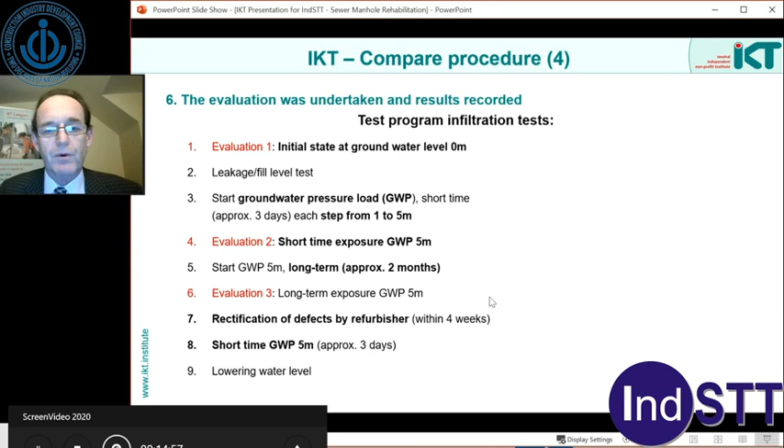In terms of when we were doing these evaluations, we looked at a whole range of aspects. We had optical condition - cracks, holes, color differences, the types of things you could easily see. An acoustic evaluation - tapping, listening for hollows, etc. A haptical evaluation, which was looking really at surface roughness, sanding, scratch resistance of the material. We did look at odor, because essentially if these things smell really badly and that smell transfers out of the manhole and causes upset for the public, or is an issue for health and safety, that had to be considered.

Overall, we were looking to see if there was physical leakage visible. We did adhesion tests to see if they would pull out, and we also did some wall stiffness tests using something called the MAC extensiometer.

Sort of things we found - so here's the mortar linings, damp patches, cracking, issues around the footsteps. That was a particular thing we were interested in, as to how these products could cope with the ladder arrangement or the step arrangement within a manhole, and actual leaks.

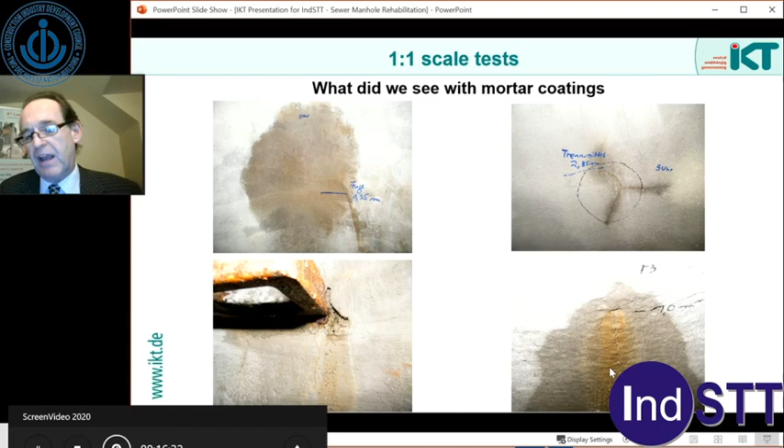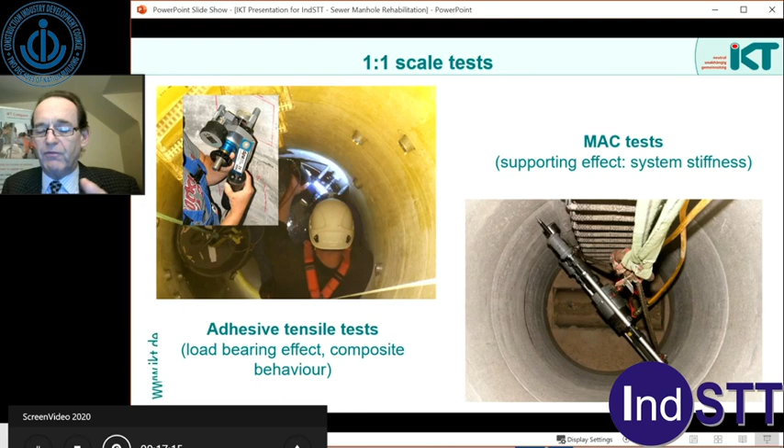I mentioned a number of other tests. We did the pull-out test using devices to check the adhesion to the side for those systems that relied upon bonding to the wall of the sewer pipe. This extensiometer applies pressure, and we can monitor movement to see what sort of strength is created by the lining system.

I mentioned the project steering group had a say. They went down into each one of the manholes, they had a look themselves, and they were able to comment on anything that they felt would be of concern if they were accepting this as a completed project. We also, because we like to check what we see in the lab against real installations, is that the same as for real? We will go out and look at real installations of the same products.

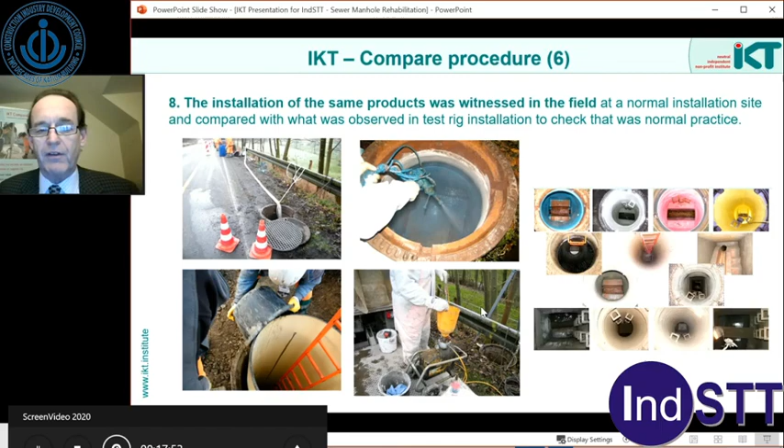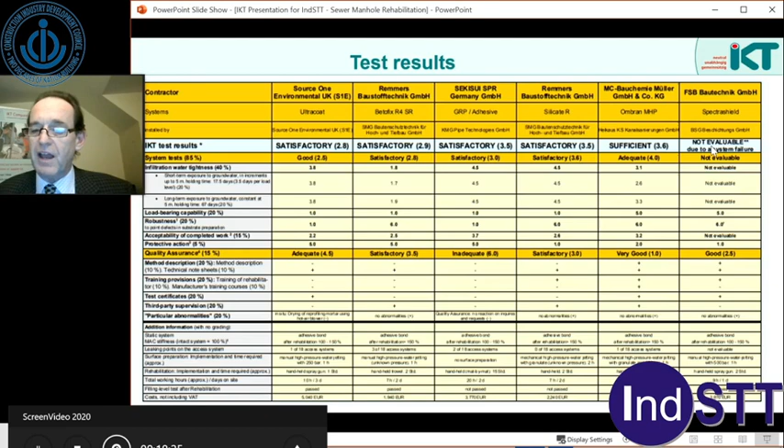The results are tabulated, and there are links at the end to show you where you can get hold of these. We score the system, the test performance, and the quality assurance, and there's a lot of other information - too much detail in here for me to explain, other than to say that we score from 1 to 6. 1 is good, 6 is bad, and we had a range of good to satisfactory here. On the second page, we got down to one which is barely sufficient or adequate, and down into not evaluatable - that was the one that failed.

So what lessons did we learn from this? First of all, we did learn that you can get reliable rehabilitation of a manhole shaft against groundwater pressure from these systems. Not all of them, but there are systems out there which will work in that way. We had a range from very good down to adequate. What was very clear was that in most cases where we did see a problem, it was deficiencies in substrate preparation.

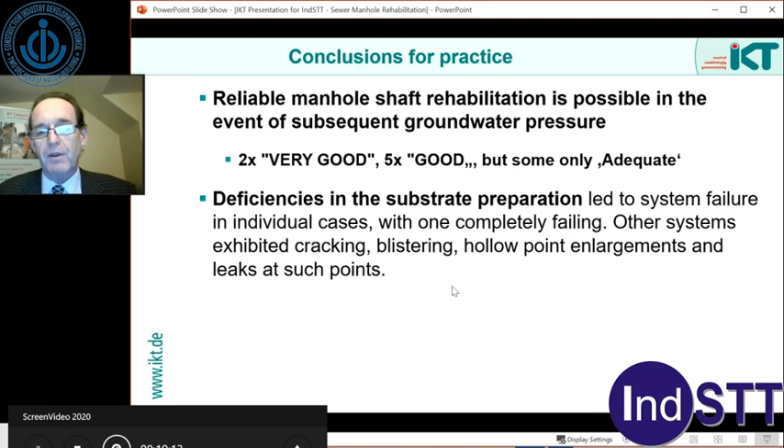This was in the field, but also with those simulations we did. So if you don't have good preparation of the substrate and the material can't bond, it will likely result in problems. We also found that if there are problems, they will appear immediately. What we tended to find was that when we raised the water table, we would see damages appearing, and they might get worse over time. But what we tended not to see over time was anything new appearing.

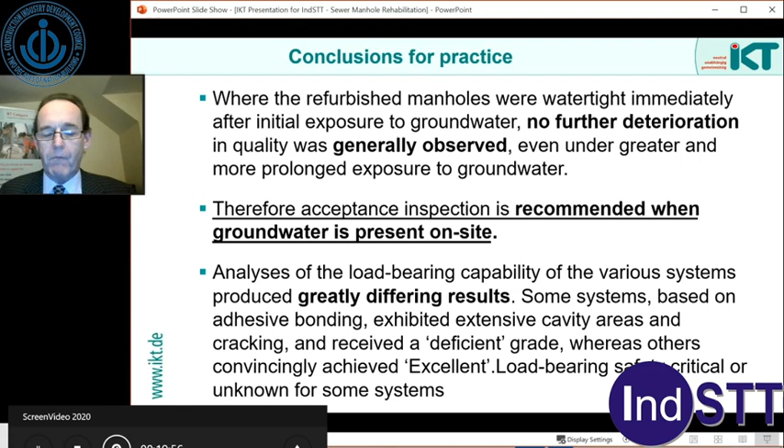We found in some cases there was no structural analysis certificate that could be provided for the product, so we didn't really know what the load-bearing safety information was for it. In fact, quality assurance tended to be very patchy, and the majority of the system suppliers weren't able to provide training certificates, testing certificates, or approvals. So there were some issues there.

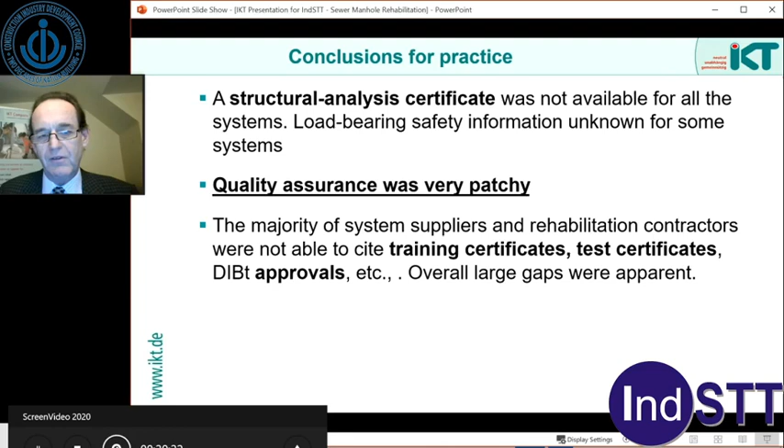So that ends the presentation. There's a summary article available in English, and full reports available in German online. IKT publishes all of the work we do in the public domain, so you can find it there. There's a couple of websites, and contact details for myself and Markus Gillar, who is the project manager. Thank you very much for this opportunity to make the presentation, and I think it's over to questions now.

Hello, and thank you for the invitation to make this presentation on the rehabilitation of sewer manholes for the NoDig conference. My name is Iain Naismith. I'm a Senior Research Fellow with IKT, the Institute for Underground Infrastructure.

The advancements that you see in India's aviation is the success saga of the excellence shown by Airports Authority of India. AAI is constructing, operating and maintaining world-class airports. Along with that, AAI has a side that's down to earth and close to the people, clearly visible in its CSR programs and activities. Through its CSR activities, AAI has keenly focused on skill development. To generate livelihood opportunities in backward and remote areas, AAI has tied up with Construction Industry Development Council for skill development of unemployed youth and people belonging to economically weaker sections. In the construction industry, there is an acute shortage of skilled manpower, and at the same time there is unemployed youth.

So if we provide them a skill, it will be a win-win situation for both. Through this skill development training, students get theoretical and practical knowledge in construction-related subjects like land survey, electrical wireman, general work supervisor, site accountant and storekeeper, etc. We are providing training to unskilled unemployed youth of India. We distribute pamphlets at different locations in UP, Bihar, and West Bengal to find unskilled manpower, then we make them skilled by providing 3 months of training. More than 5,000 students have been trained with this skill development program since 2015.

To generate livelihood opportunities in backward and remote areas, AAI has tied up with Construction Industry Development Council for skill development of unemployed youth and people belonging to economically weaker sections.

In construction industry, there is an acute shortage of skilled manpower. At the same time, there is unemployed youth. So if we provide them a skill, it will be a win-win situation for both.

Through this skill development training, the students get theoretical knowledge and practical knowledge in construction-related subjects like land survey, electrical wireman, general work supervisor, site accountant and storekeeper, etc.

Here we are providing training to the unskilled youth of India who are unemployed. We distribute pamphlets at different locations of UP, Bihar, West Bengal to get unskilled manpower, and then we can make them skilled. We provide them 3 months of training. More than 5,000 students have been trained through this skill development training program since 2015.